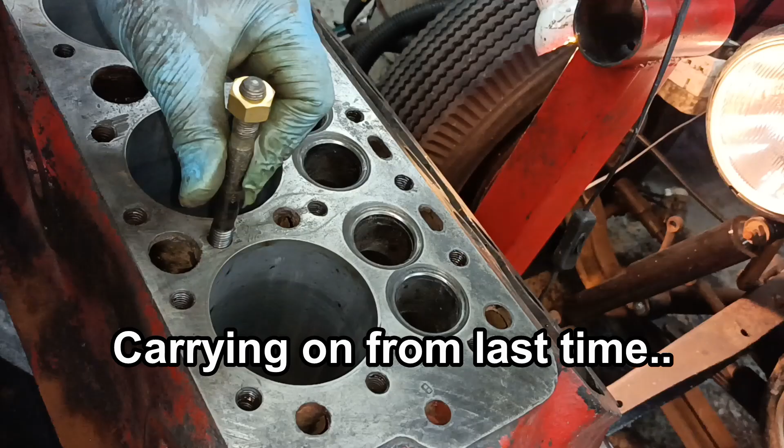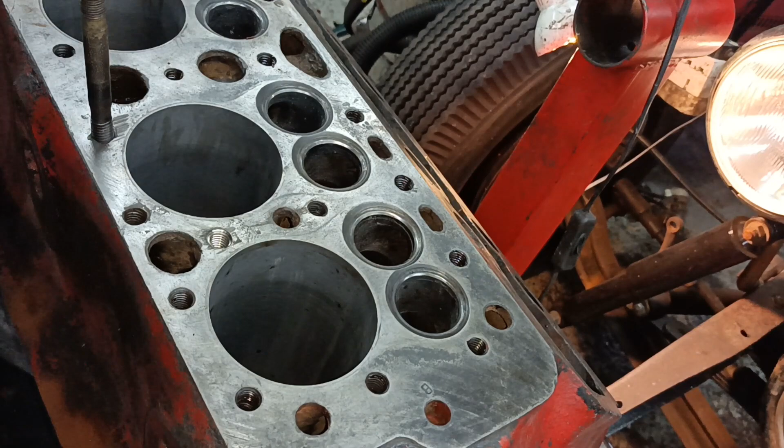Okay, this one here is damaged as well. Can you see? You can see it's kind of there, but can you see how wobbly it is? So I was thinking I'd do this one as well.

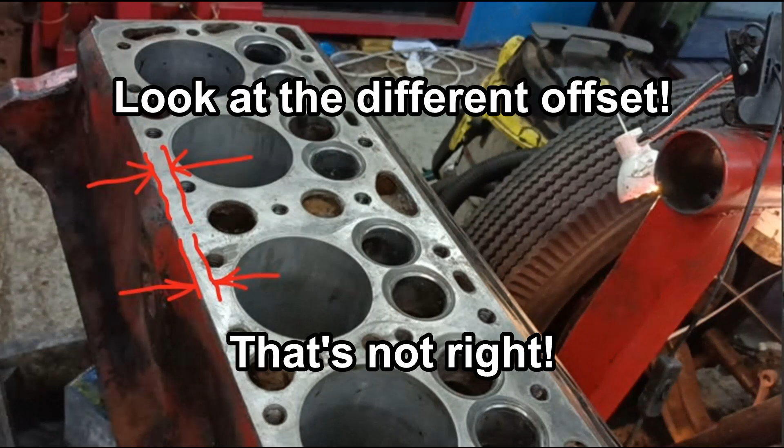See, this drill is actually quite close to that size there. So what I think I'm going to do is carefully use this to help me. So I'll get a couple of bolts. Okay, I'll use that as a drill guide. I'm just going to have to go as straight as I can with the drill.

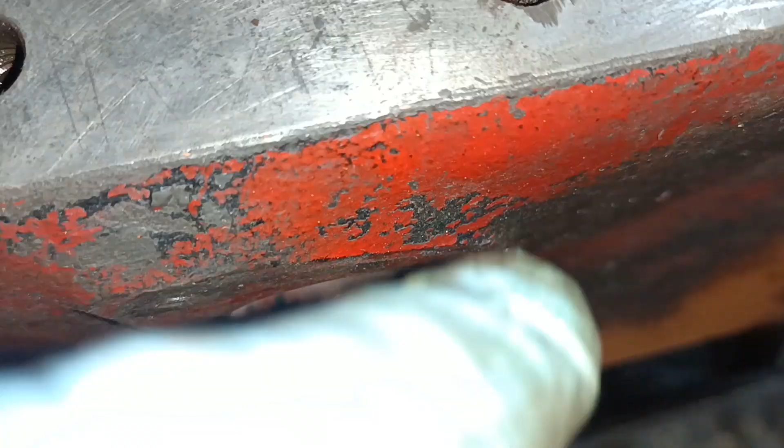Can you see that I'm trying to drill over here? This is going to take a much more detailed repair than a helicoil. So what I think they've done is they've gone through and drilled again, re-tapped, but it's over here instead of over there. The thing is, if you look at that, you can see there's a difference in that dimension and that dimension, isn't there? That hole's not in the right place.

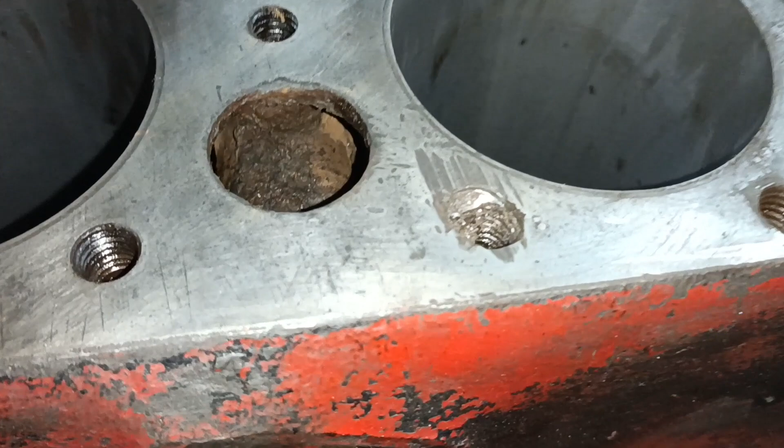I think I might take a couple of snaps and send them to Richard, see what he thinks. Shit. Okay, righto, I'm going to leave it at that for now, because to be honest, I can't really see a way forward on this, but it might be that it's got to go to a proper engineering shop. I'll bring you back when there's more to show.

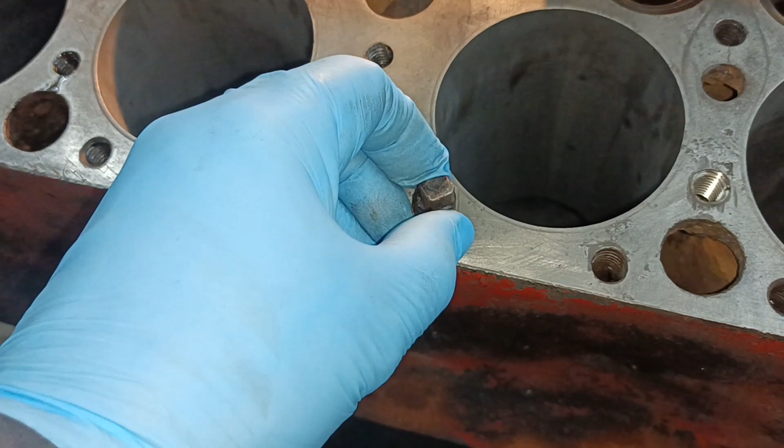I've had a chat with Richard and we've kind of come to the agreement that I will have a go at trying to mend this. This is my initial idea. I will tap that hole there for this plug. I will put this plug in and then cut it off. Then I will come in on centre and re-drill and tap. It might just work. You never know, do you? It's worth a try. I'll give it a go.

That's a 1/4 NPT, isn't it?

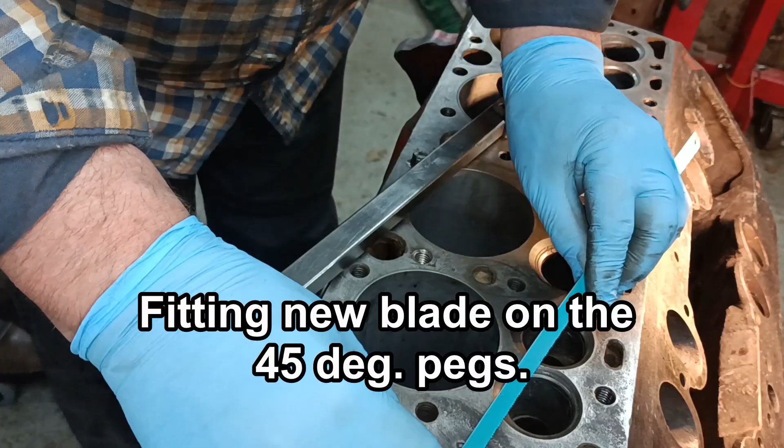I don't know if you see what I'm doing. I've got like a ratchet with a square thing and got like a 3/8 to 1/2 inch adapter. I'm kind of putting a bit of twist on it like that to kind of lift the blade.

That's flush. That's flush. Okay. What I think I'll do, obviously I'll sleep on it and have a think. What I'll do, I'll make a sleeve that will go down the hole in the cylinder head, and I'll go in with a small pilot drill, and I'll get that drill thing rigged up that I use, and I'll drill with a small drill. Then I'll open it out, open it out, open it out, and hopefully open out until I come into the original core diameter of that thread there. And I'm hoping I might be able to get rid of the remnants of the original stud and make a new thread, extend it into this piece that I've just put in. Who knows, it might work, it might not, who knows.

It's about as close to the size. It's actually the tapping drill that I used. I just want to put a mark in the middle of the hole. This drill's magnetic. Well, that does look like it's centered up in that, you know, what you can see the remnants of the old hole, doesn't it?

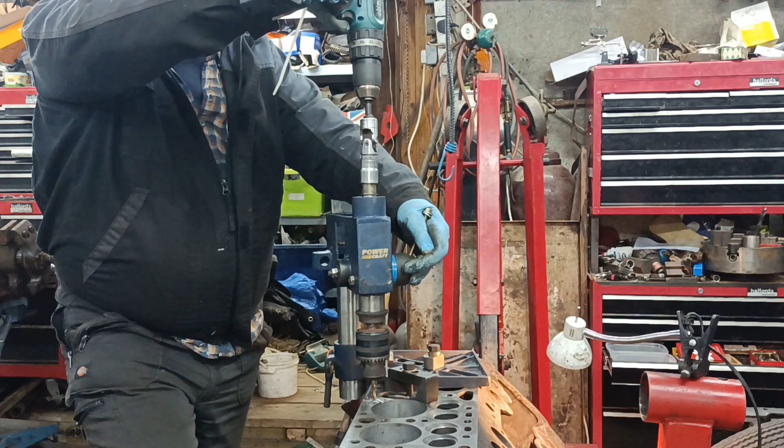I'm doing it very slowly because I don't want to force it and I don't want to make too much noise. It's quite late here.

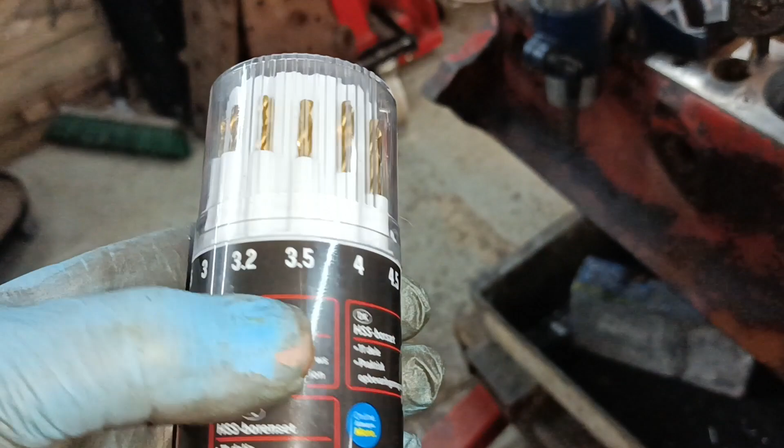That's a 5mm drill, just to act as a pilot there. I bought a brand new set of drills, so I thought, well, I'll give them a try. They've got the best chance, haven't they? They were only cheap, you know, from Lidl's. So just put the 5 through, so they only go up to 8mm, but I'll shove the 8 through and take it from there.

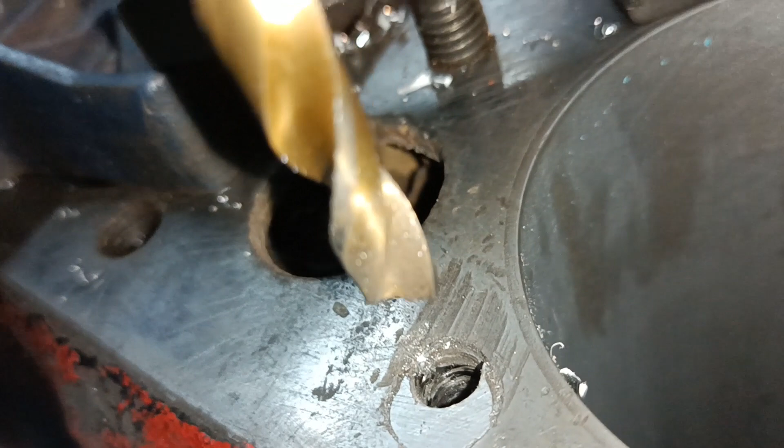Okay, let's see if the camera can see. I'm not 100% sure if that's okay or not. Righto. But, you know, it's better than it was.

I think if anything that hole's actually gone a little bit that way. Judging that this hole and this hole are in line, I think it's actually gone that way a little bit. That's why I can see threads.

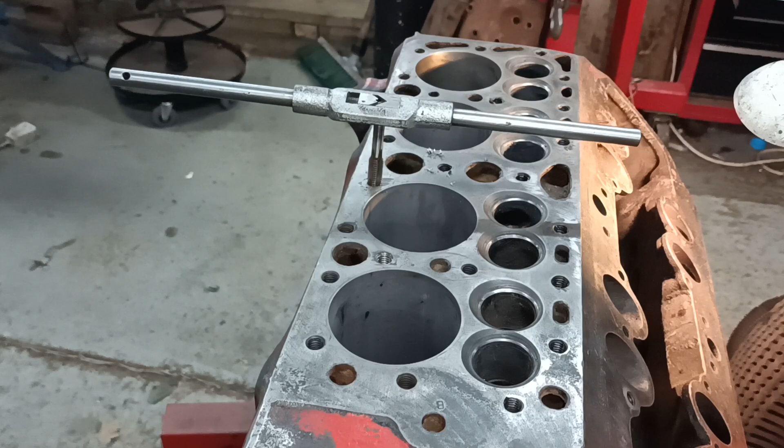I'm not saying a lot because I just don't know how this is going to go. There's a certain amount of desperation on this job. You have to understand that.

I think that'll hold, won't it? And we'll use a stud in that one. I wouldn't say it's 100% perfect, but I think it's okay. Put a stud in. It might be slightly out of position. Let's have a look.

Yeah, I think it's a bit out of line. Oh, that's it, and it's at an angle. Oh, it's not out of line, but it's at a slight angle.

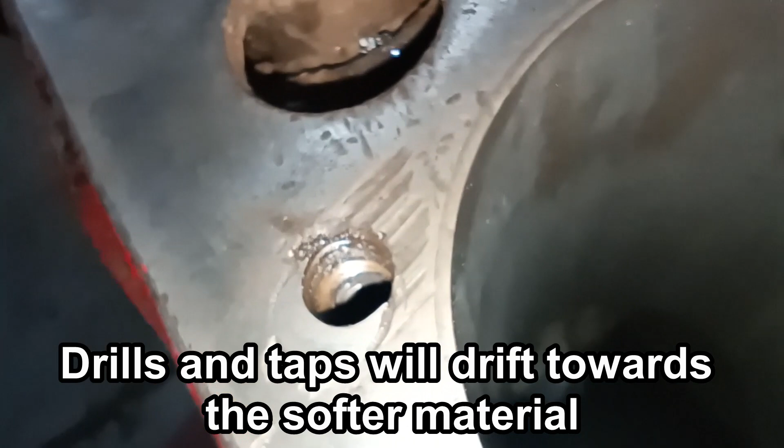I think it's worth having another go at it tomorrow, isn't it? I'll get a cylinder head, go through with a helicoil drill, line it up like I did the other one and put a helicoil in, see if I can get it a bit straighter. I'll bring it back when there's more to show.

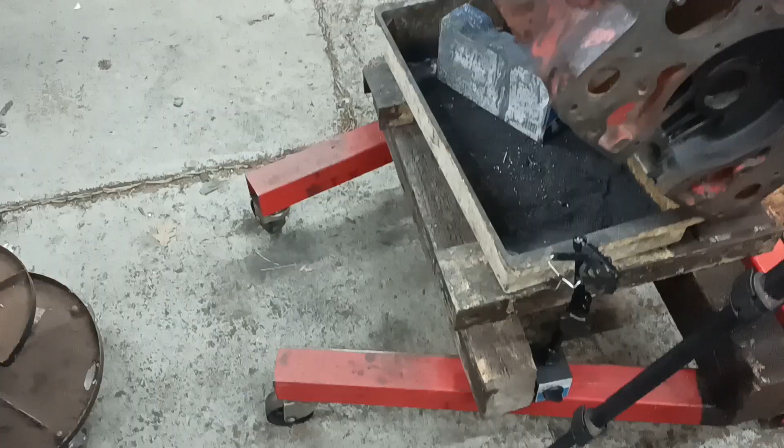Hello, it's the day after and I'm going to have another go at this repair. I'm not happy with it at all. It's not quite in the right place and it's at the wrong angle.

So what I thought I would do is establish a triangulation between this bolt, that bolt and that bolt, and get the dimensions using this side as the sort of master. So I'm going to just take these measurements now, close to the bottom.

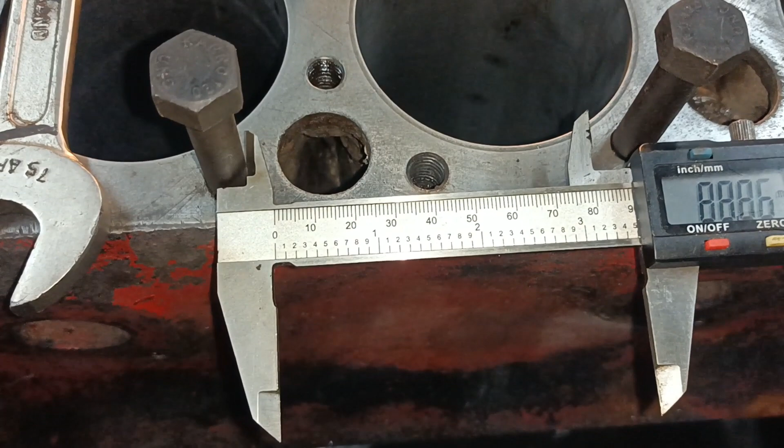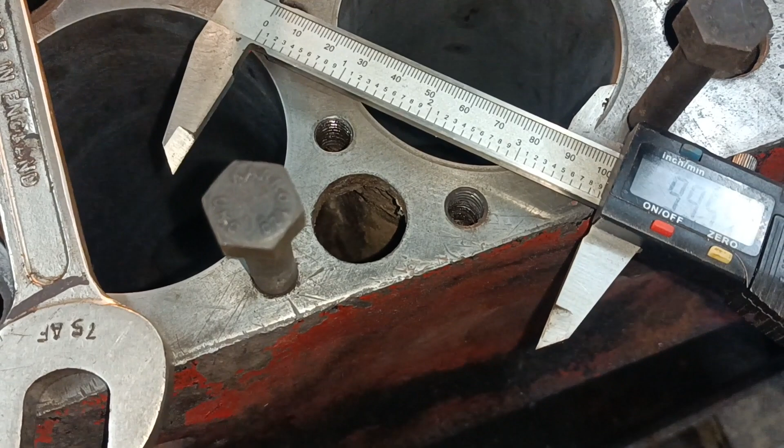So I'm using my phone as a record. This is the internal measurement: 99.5. And in a similar place, about a quarter inch up, a bit less maybe: 106.79.

Okay, let's put them in there and see what they read. 99.38. 106.05.

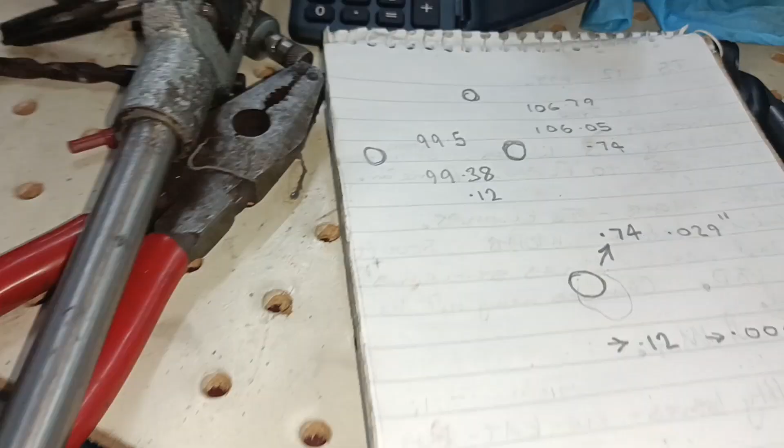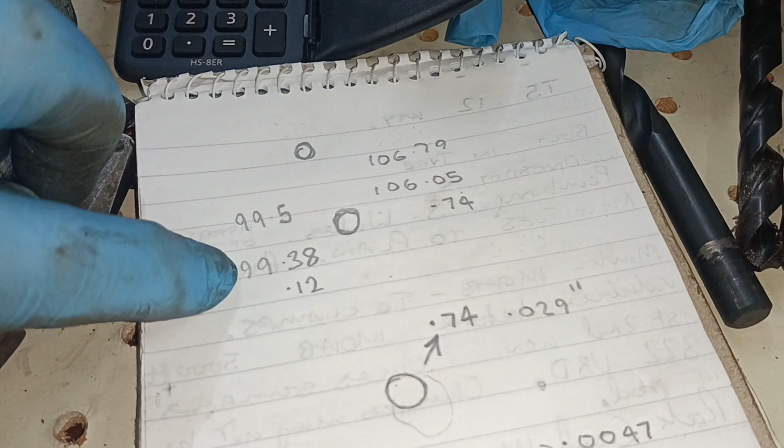Right, if you imagine these are my 3 bolt holes, that's the measurement from the good side, and this is the measurement from the bad side. So it's 0.12 of a millimetre in on the bad bolt hole, which is 4.7 thou. That's not very much, is it?

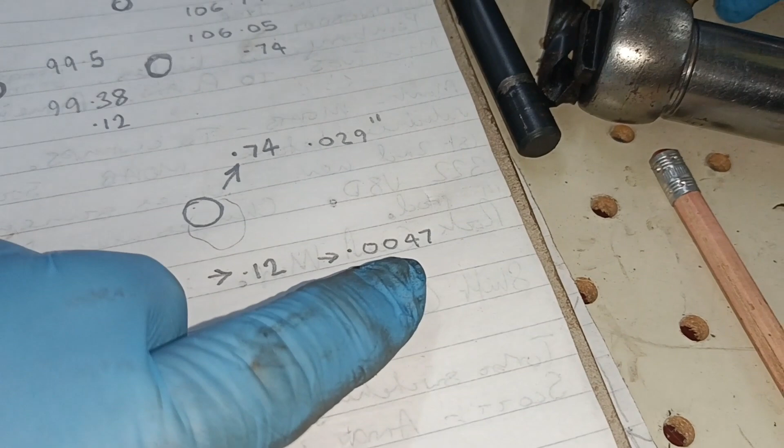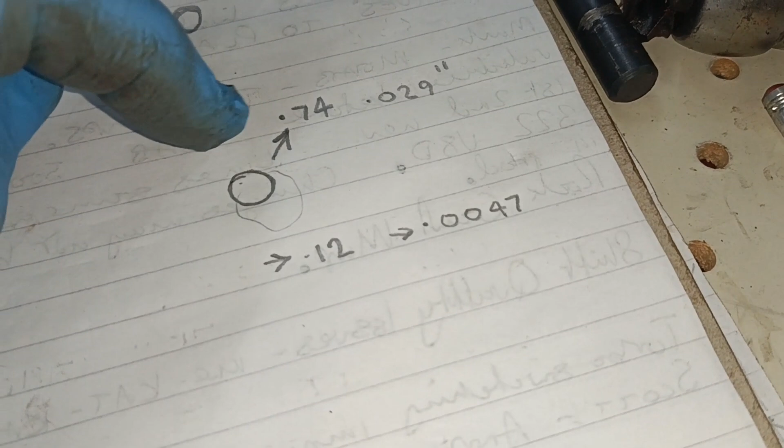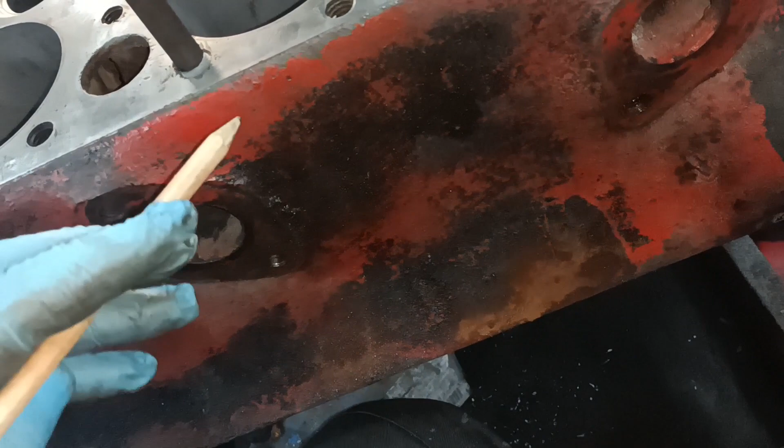So it's not out, in line with the engine, to the other bolt hole, which is at a 45-degree angle - it's 0.74 of a millimetre, which is 29 thou. So this bolt hole is 29 thou closer to this hole than it should be. So it should be over here a little bit, and this way it's okay.

So what I'm going to do is rig up some sort of way of drilling it and try to get it in the right place, which could be easier said than done. Leave it with me and I'll think about how I'm going to do it.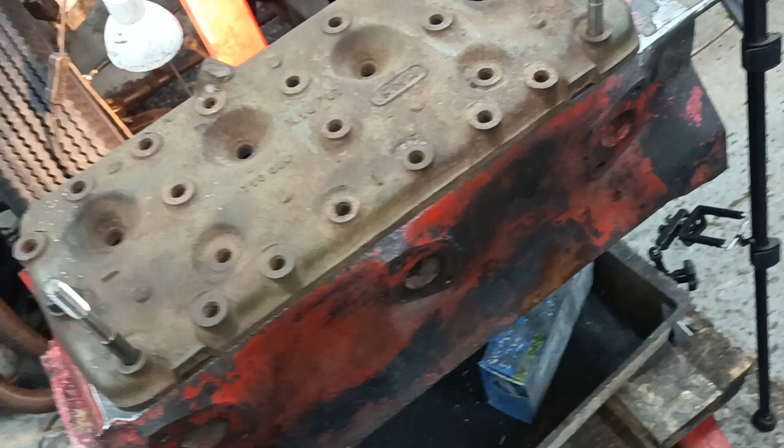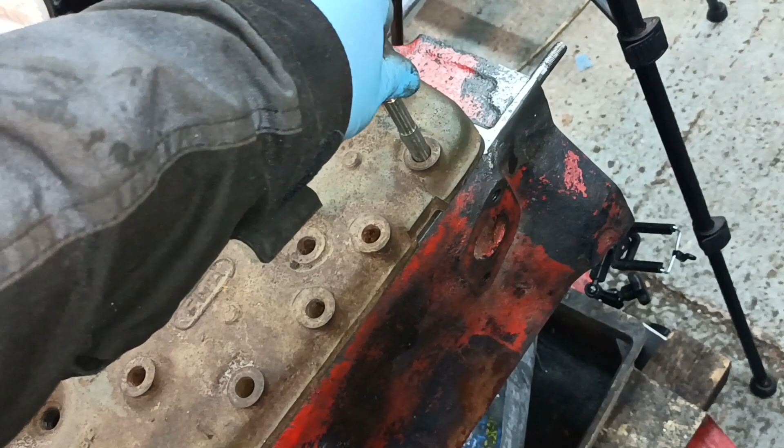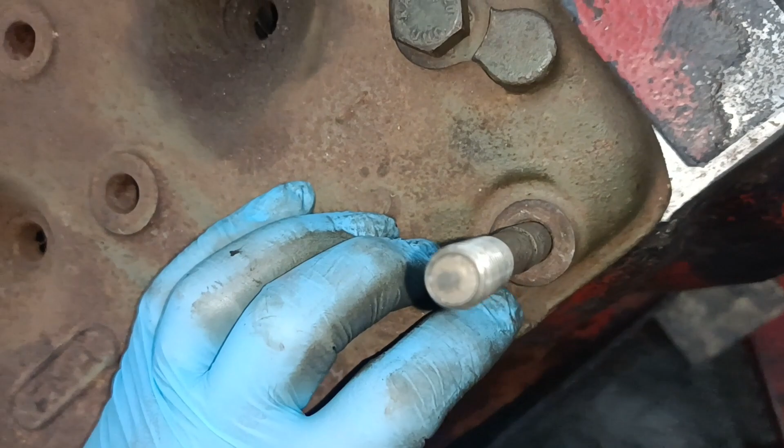This is a French head and it uses the same bolt pattern as the 8BA. I've bolted the head on and I've put 2 studs in there, and I have eyeballed the studs so that they look central - in other words, the head isn't off to one side on the play on the bolts. So those studs are central. So if you look down the holes one by one, they look well lined up.

But if you look at this hole, you can see it's not very well lined up. So I'm going to try and send a drill down and drill it out and put a helicoil in it. Okay, righto. Wish me luck.

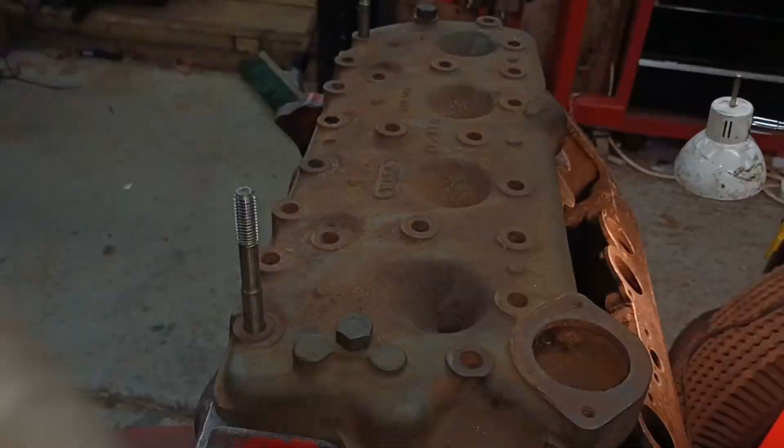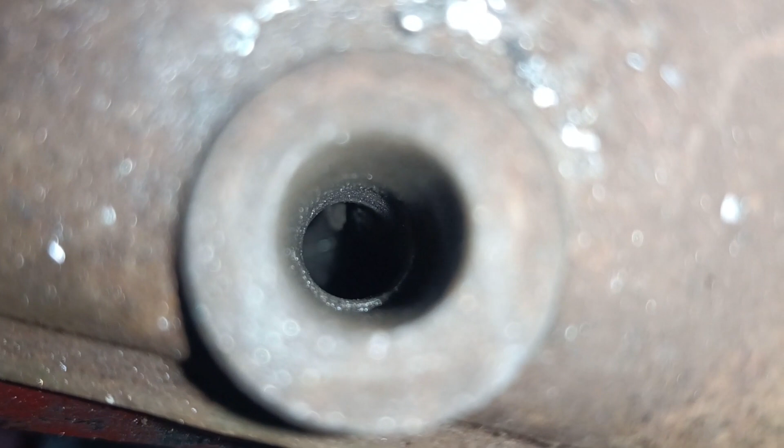Okay, so we'll look down the hole. It's still gone a little bit that way, hasn't it? I think I'm going to have to go with that because I can't afford to go oversize. Might as well just share the experience. Okay, that's how it's looking.

Okay, not 100% happy, but I don't think you can do anything but just give it your best shot. This is the head with the tapped hole.

I wonder if I can clamp this down in such a way that it tries to push the tap to that side a little bit. It wants to come down that way, doesn't it? No, I think I need to just let it go in naturally, otherwise it'll probably end up at an angle again.

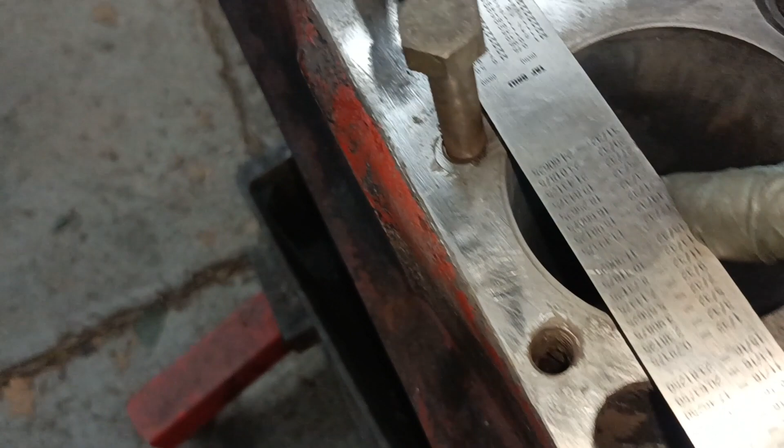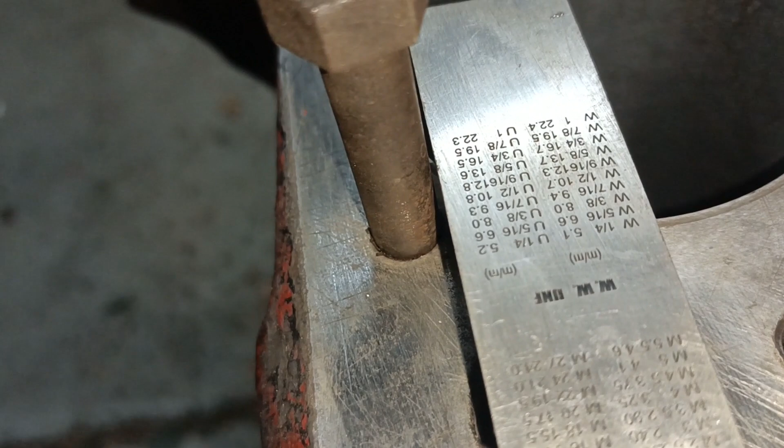Put a straight edge along there, like a ruler, and it's touching all three. Or maybe, well, you know, very close, very close. Sorry, it's not quite touching that one there, but you can see it's just a couple of thou, few thou. That's all right, I think. Yeah, that's all right, I think.

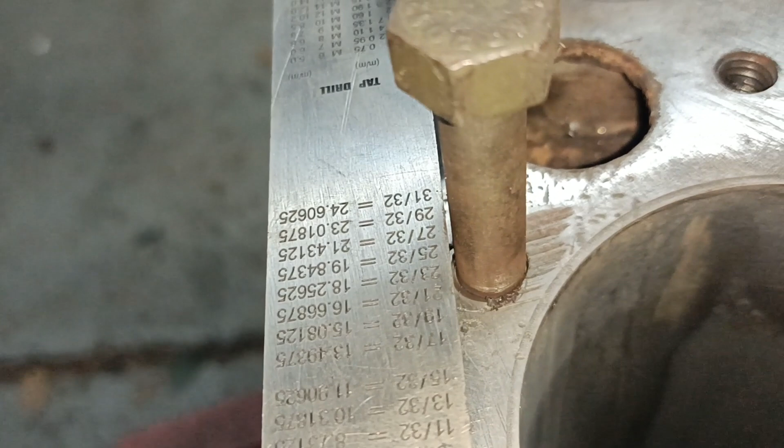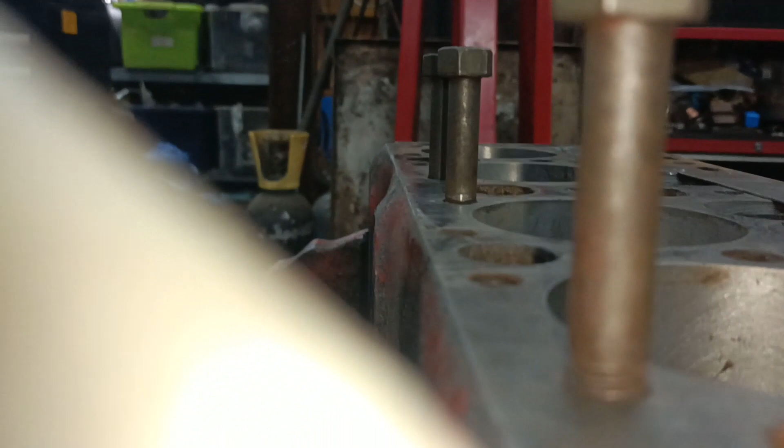It's off position by that much there, which is not very much at all. So it is off position by a very small amount. So the question is, can you bolt a head on? It's very slightly off that way, but they are in line. When you look, they're not at an angle. It's not at an angle.

Let's take these out then and see if the head will bolt on. It's probably about 20 thou or half a millimetre out, something like that. Oh yeah, oh. Is it going? Is it gone? Don't think it's gone, has it? No. Okay.

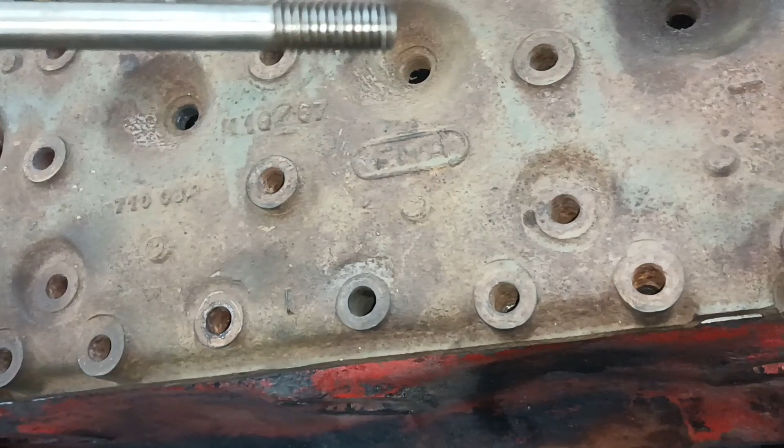Oh, well, it looks okay, doesn't it? Yeah, I think the hole will just need a very slight relief in that direction, or use, you know, I don't want to force it. I mean, that's going in, look, because it's got a reduced diameter on the shank. You can see it's just slight, isn't it? I think that'll be okay.

And we can just either use a bolt with a slightly reduced shank, or well, I just don't know, to be honest. It's up to Richard. We'll have a chat about it and work out what we want to do. But I think it is within the realms of what I was able to do here at home.

That's gone in okay, actually. Maybe it's just that bolt was no good. Yeah, maybe just that bolt's no good. Hang on. Oh, that goes in fine. That goes in absolutely fine. It was that bolt that was no good.

Okay, good. Let's try a different bolt. Here's a short bolt, actually. I didn't spend time cleaning the bolts up or anything. Oh, that's absolutely fine. Okay, good. Look at that, perfect.

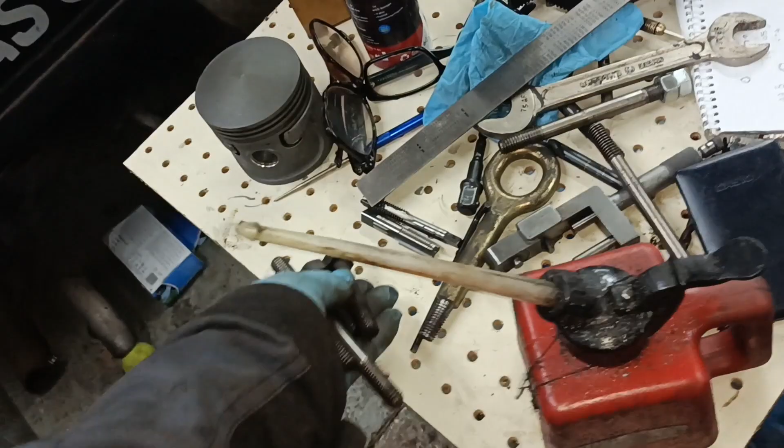That's pretty good, I'd say. Feels okay, you know. It's not as tight as an original Ford thread, because they are cut tight. So there's a helicoil in that one. There's a helicoil in that one. I think that's come out pretty good. I think that has come out pretty good.

So it's bored, honed. So what I'll do now, I'll let him know it's all done, and I will wait for him to pick it up. There we go. Nice.

Righto, I hope you found that interesting. I had a go at it last night and kind of ballsed it up, but I think that was a little desperation kicking in, you know, gotta fix it, a bit of gotta-get-there-itis. So I came back out today with a different frame of mind, and you've always got that backstop of being able to helicoil it. So yeah, a helicoil saved the day. That's steel, so it's not weak. That should be a good repair. It's threaded there. It's not ideal, but I'm sure, as one of 24 studs or bolts, it'll be absolutely fine.

Hello, here's the finished job. As finished as it needs to be. Tapping drill for 7/16 UNC. 7/16 UNC thread, tapping drill for 7/16 UNC helicoil, which is 29/64, and 7/16 helicoil tapping size. I might never use it, but I might use it. I thought it'd be an interesting little exercise for drilling and tapping.